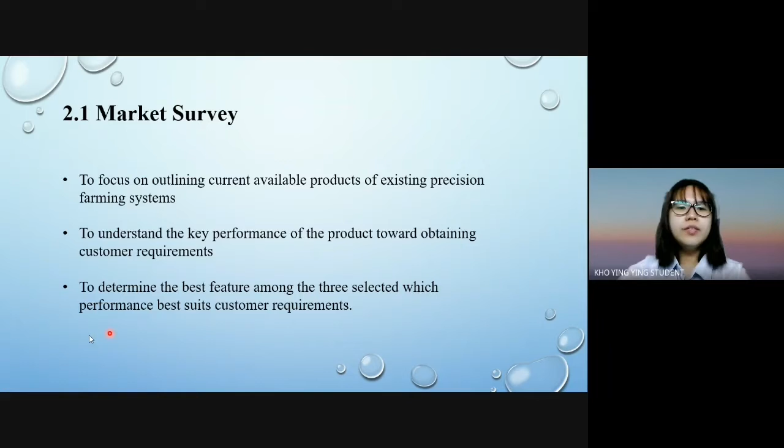Chapter 2, Need Analysis. Market survey focuses on outlining current available products of existing precision farming systems, to understand the key performance of the product towards obtaining customer requirements, and to determine the best feature among the three selected which performance best suits customer requirements.

Benchmarking of competitive products. The first product is Gardena Micro-Drip Irrigation System. It's a timer-based irrigation system that is powered by a battery in order to supply water to the plant.

The next product is Manual Simple Irrigation System with Fertilizer Mixer, which is a simple manual watering system that requires electrical power from the power grid. The last product is TB-hyve XR Smart Sprinkler Control, which is a Wi-Fi based sprinkler timer used to irrigate farms.

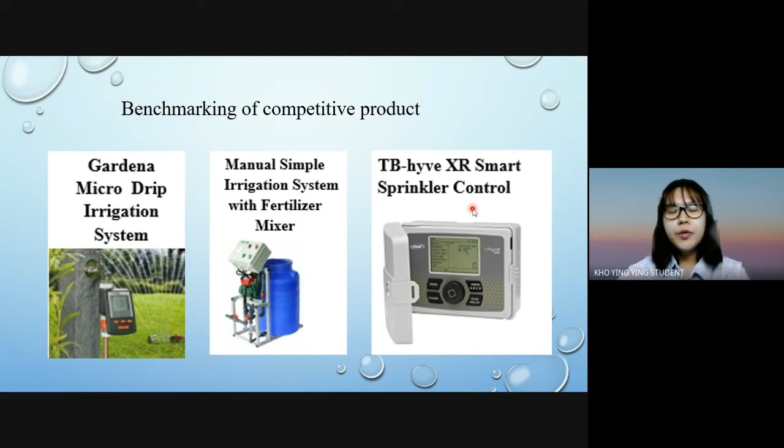Design of market survey: there were 50 respondents through a questionnaire survey. The questionnaire is generated through Google Forms, which gives the advantage of reaching farmers, especially those that stay in rural areas.

These two charts show the customer requirements of respondents for the irrigation system. The chart shows the questions we asked in the Google Form, and the feedback of respondents to the smart irrigation system.

It shows that the percentage for the smart irrigation system being environmentally friendly is the highest at 72%, showing it is the main priority for the system. Following with the second highest percentage at 68% is that the smart irrigation system can minimize water usage and save time. The third highest percentage at 66% is that the system uses low electricity and can reduce manpower.

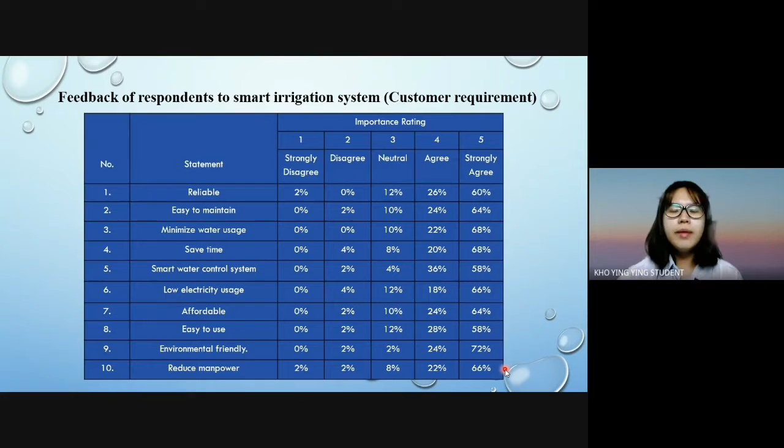The table shows the respective weightage of each criteria: minimize water usage, save time, low electricity usage, environmental friendly, and reduce manpower are rated with a weight of 5 due to their high demand. Weightage of criteria with a weight of 4 is for criteria above 60%, and weight of 3 is for criteria at 60% and below.

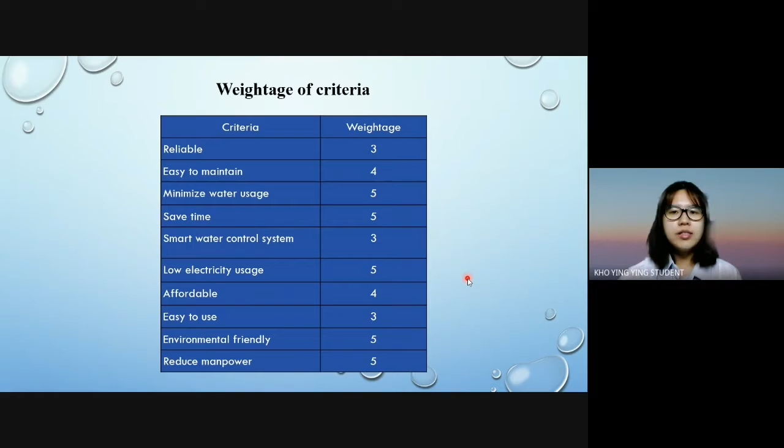I will explain about Chapter 3, Design Specification. In Chapter 3, we have the House of Quality. House of Quality is a kind of conceptual map which provides the means for planning and cross-functional communications.

It is used to define the relationship between customer desires and the product or company capabilities. The HOQ diagram uses a design that resembles the outline of a house and can be created using technical and competitive benchmarking data. HOQ is considered a primary tool used during quality function deployment to help facilitate group decision making.

As we can see from the chart, it contains customer requirements on the left side and design requirements or engineering characteristics on the upper side. Based on the chart, cost is the highest among other engineering characteristics, followed by volume of tank in second place and durability in third place. From this, we know what is most important to the customer.

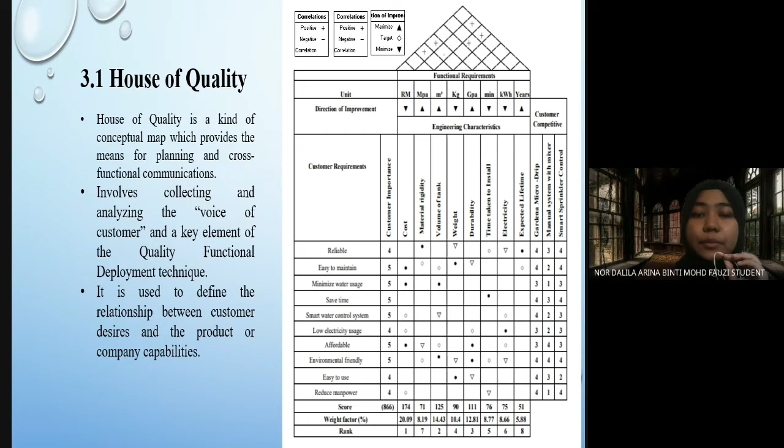This is the Product Design Specification, or PDS. The PDS is the basic control and reference document for the design and manufacture of the product. It is a statement of what the product should be and should do. The PDS is created during the problem definition activity very early in the design process.

There is product identification, special features, key performance target, service environment, market identification, financial requirement, life cycle targets, manufacturing specification, key project deadlines, social, political, and legal requirements, and lastly, physical description.

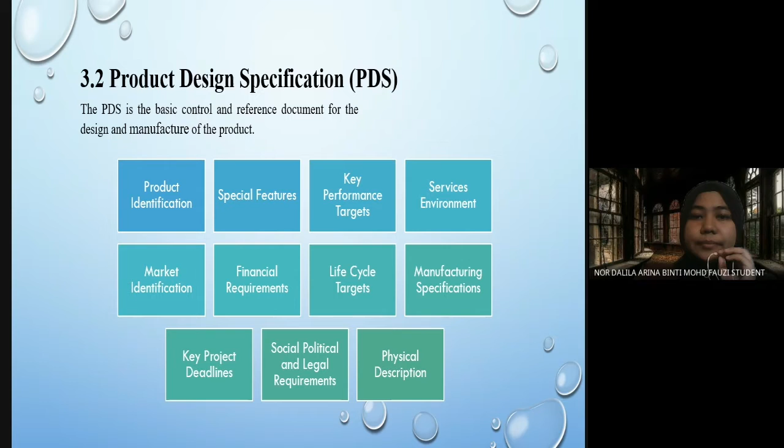Next, we move to Chapter 4, Concept Generation. In concept generation, there is physical decomposition, which is a process of separating the product or system into subsystems, subassemblies, and components to describe the parts joined together to create the behavior of the product.

From this picture, we can see the smart irrigation system has three subsystems, which are the mechanical subsystem, control subsystem, and power supply. Under the mechanical subsystem, there is the pump and valve, which we use to operate the water.

Under the control subsystem, there are Arduino and sensor. Arduino is a microcontroller that has a USB connector and power port. For sensors, we use humidity and water level sensors. For power supply, we use battery and solar panel.

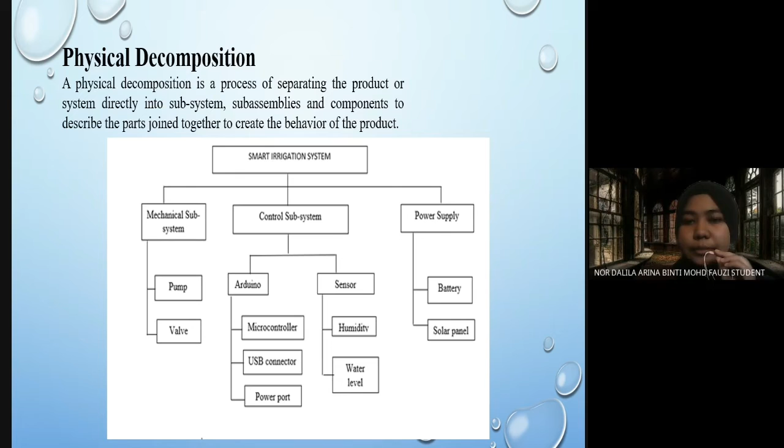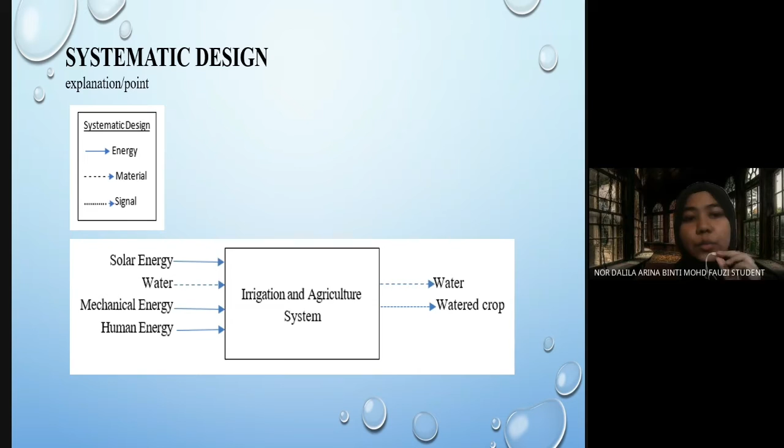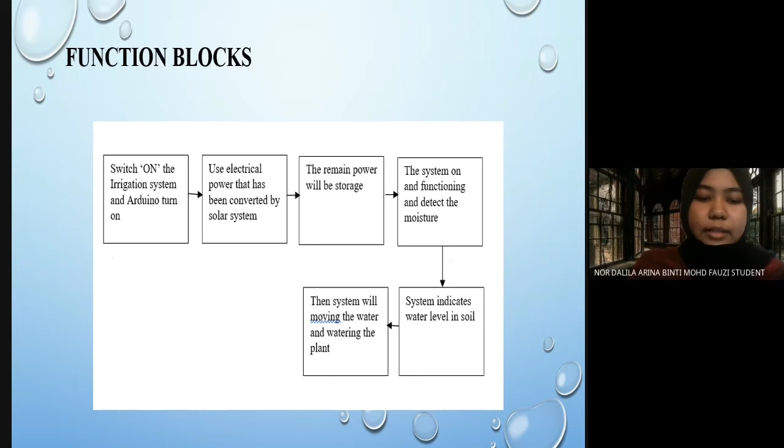Next, we have function blocks. The figure shows the function blocks of the smart irrigation system, representing the importance of each function of the device being used. There are three concepts that we proposed. After a few discussions among members, we agreed to choose concept 1.

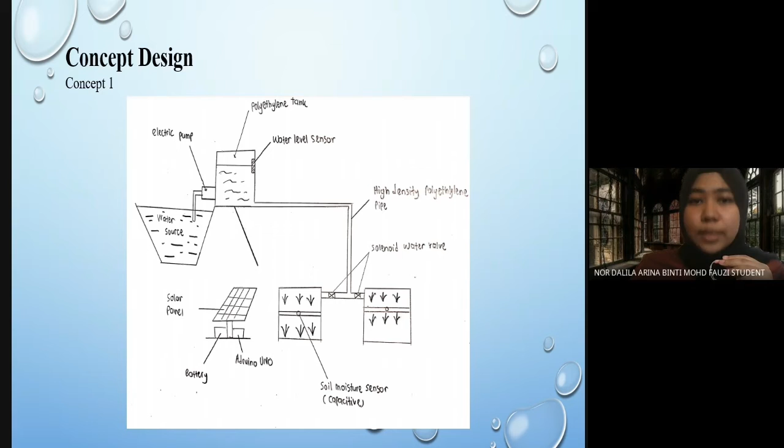Next, design parameters and constraints. An important part of the problem recognition phase of the design process is to identify important design issues or parameters for consideration. This will form the criteria against which we will evaluate the design alternatives. In a project report, we need to identify which parameters need to be considered and additional parameters that need to be added to the list.

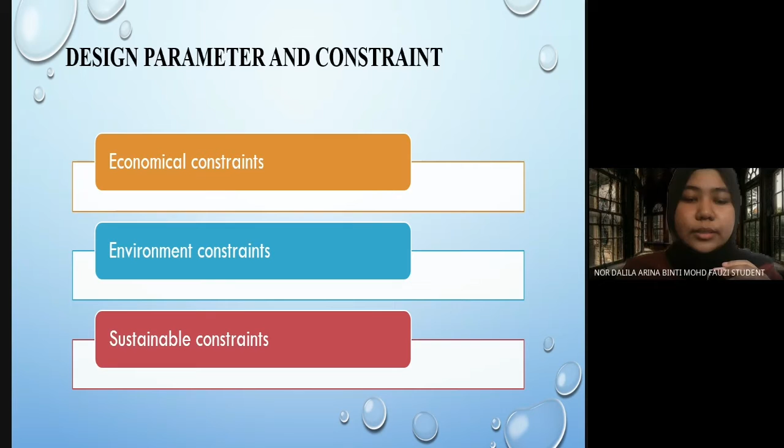First, we have economical constraints. Then we have environmental constraints. Last but not least, sustainable constraints. That's all from me, thank you.

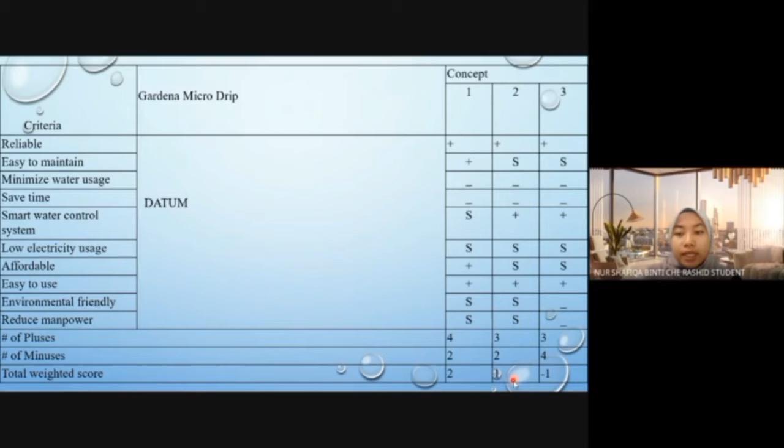Concept 1 obtained the highest total weight, which is 2, while concept 2 obtained 1, and concept 3 obtained negative 1. So the second Pugh chart is created to determine the best final concept by using concept 1 as the datum. Concept 3 shows relative weakness in friendliness and reducing manpower. The total weight scores of concept 2 and 3 both obtained negative values. Thus, concept 1 is the best concept among the others generated.

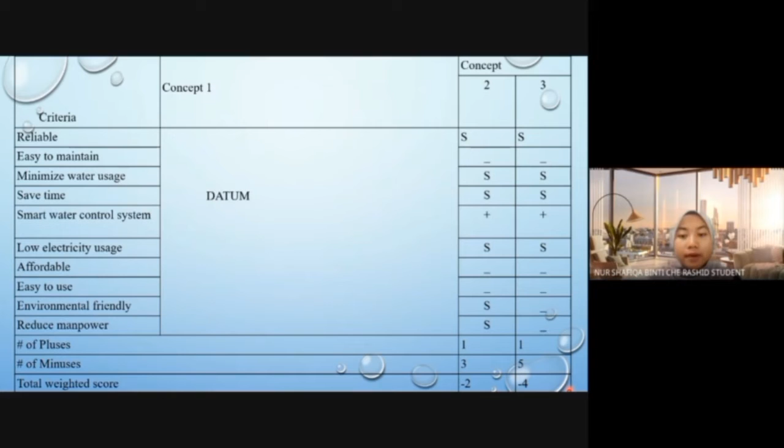The next method is the weighted decision matrix. A weighted decision matrix is a tool used to compare alternatives with respect to multiple criteria of different levels of importance. It is a list of values in rows and columns that allows an analyst to systematically identify, analyze, and rate the performance relationship between a set of values and information. The matrix is useful for looking at large masses of decision factors and assessing each factor's relative significance.

A rating for each concept at each design criterion is obtained by multiplying the score and the weighting factors. The overall rating for each concept is the sum of these ratings. So the rating for each concept has been obtained. From the table, we know that the weighted decision matrix indicates that the best overall design concept would be the one with the highest total, which is design concept 1 with a rating of 7.82.

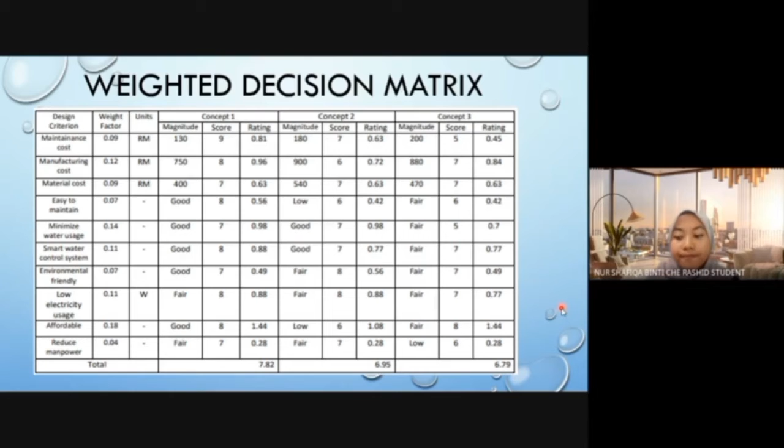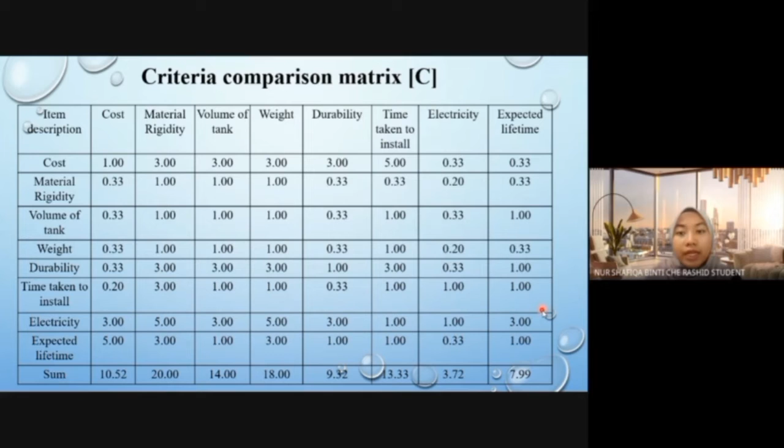So we proceed to the next method, which is the analytic hierarchy process. AHP is a methodology for making a choice among a set of alternatives when the selection criteria represent multiple objectives, have a natural hierarchical structure, or consist of qualitative and quantitative measurements. The function of the AHP rating system is to create the initial comparison matrix as shown in this table. The AHP process for determining criteria weight completes a criteria comparison matrix using a rating of 1 to 9, as described in this table.

So for the last one, the selected design concept. As you can see here, conceptual design 1 is selected as the final design project. It was selected due to making complex decisions using AHP, weighted decision matrix, and Pugh chart, which consider important criteria. The criteria were obtained from the results of the House of Quality based on engineering judgment.

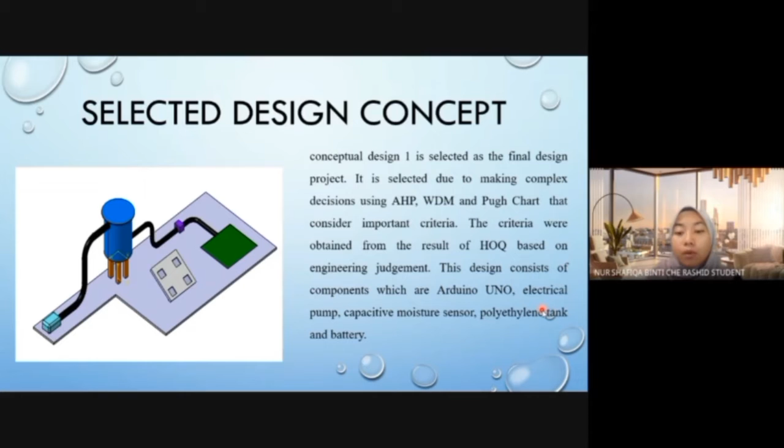This design consists of components which are Arduino Uno, electrical pump, capacitive moisture sensor, water level sensor, polyethylene tank, and battery. That's all for my part. Thank you.

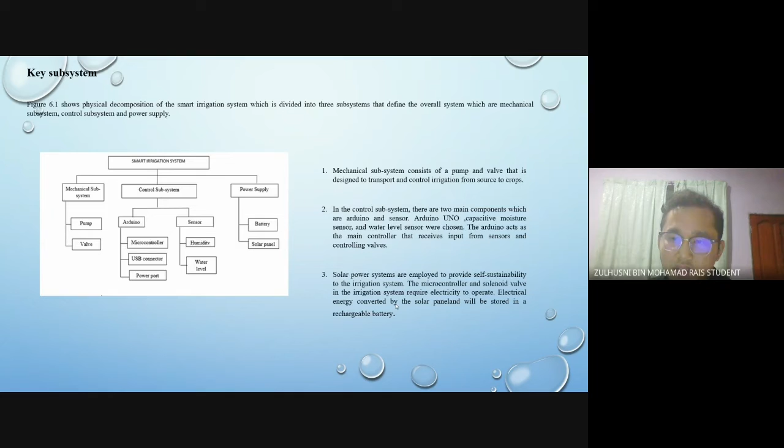Arduino, capacitive moisture sensor, and water level sensor were chosen. And lastly, a solar power system is employed to provide self-sustainability to the irrigation system. The microcontroller and solenoid valve in the irrigation system require electricity to operate.

Electrical energy converted by the solar panel will be stored in a rechargeable battery.

Next is product architecture. Product architecture relates to function elements and function structure. First, solar energy is captured by the solar panel and converted to electrical energy.

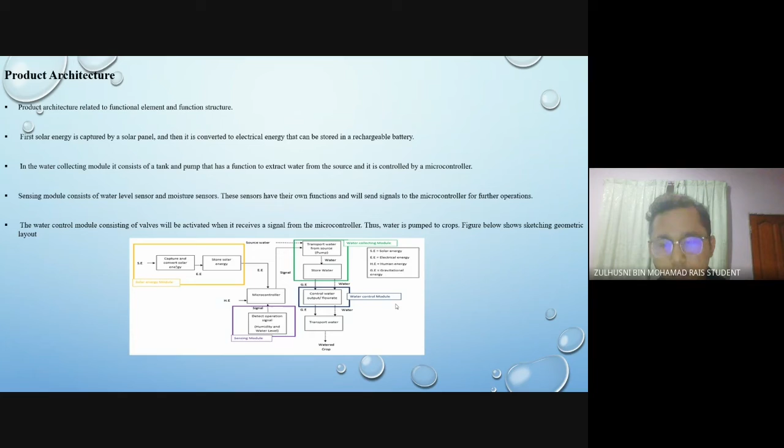Then in the water collecting module, it consists of a tank and pump that has the function to extract water from the source. Then the sensing module consists of a water level sensor and moisture sensor. These sensors have their own function and send signal to the microcontroller for further operation.

Then last, the water control module consists of a valve which will be activated when it receives a signal from the microcontroller. So this is the sketching geometric layout, and real prototype design.

Configuration design. Configuration design problem is mechanically involved finding optimal assembly of components that realize some desired performance criteria. It is a type of operation of conceptual design in which physical design forms from a set of predefined elements and structure, which I will synthesize and continue to detail design and prototyping.

In this configuration design phase, the part layout will be refined. The part layout is the process where all specifications, parts, and estimation of components are combined and created to become one product. There are several schematic drawings.

Parts and components needed to build the smart irrigation system circuit are shown in the schematic drawing. Different system parts and components have their own function to support the operation of the system. In this system, we use two types of sensors.

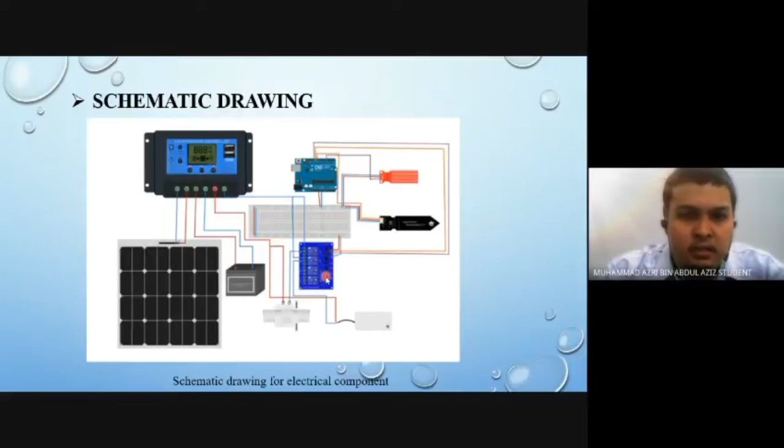The following table will show you the parts that we use in our project: water level sensor, moisture sensor, solar panel, solar charge controller, battery, solenoid valve, water pump, and a relay. Each component has its distinguished function in order to establish the entire system. So there are 8 main parts that we use in drawing.

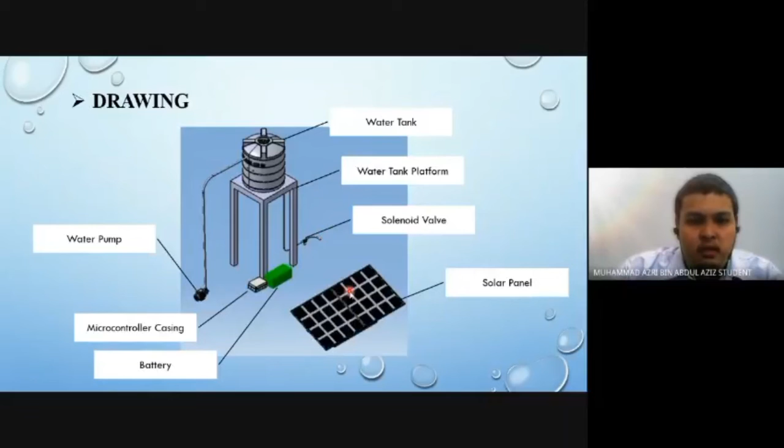The isometric view of the smart irrigation system is drawn using CATIA, which is a computer-aided three-dimensional interactive tool that consists of a water tank platform, solenoid valve, solar panel, battery, microcontroller casing, and water pump.

Engineering analysis. The three-dimensional model of the smart irrigation system is translated to ANSYS Workbench in order to perform analysis. The analysis done is static structural, which is to analyze the total deformation of the water tank platform, or we can call it the water tank base.

So the assumption is we have a tank with a capacity of 400 liters, and the platform material is made from concrete. As you can see in this picture, this is the meshing process. Meshing is a process that divides geometry into multiple elements. It has influence on simulation convergence and accuracy.

On this side, you can see the result for total deformation. Before we can get the result, we must determine the pressure exerted on top of the platform base. From the assumption, 400 liters of water exerts around 400 kilograms of mass, and with respect to the area, we calculate the pressure and find it to be approximately 5,000 Pascal.

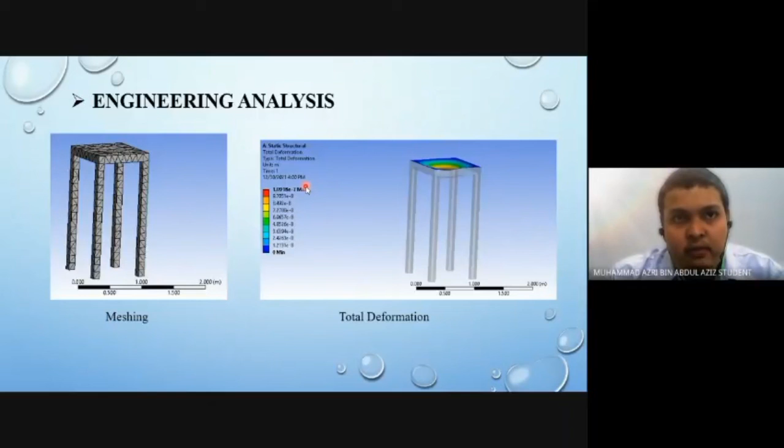So after we apply the pressure on the top platform, we get the result, which is the maximum total deformation shown in units of meters, equal to 0.00109 millimeters, which is relatively small. This type of analysis tells us that the choice of capacity of the water tank and the material for the platform base is suitable.

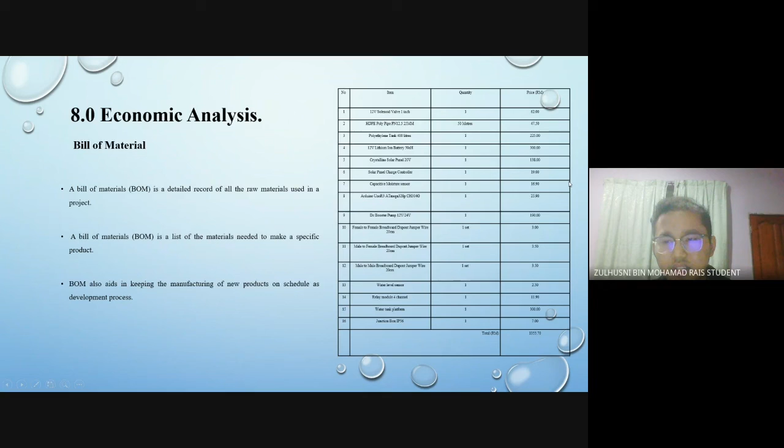Chapter 8: Economic Analysis. Bill of Material. A bill of material (BOM) is a detailed record of all the raw materials used in a project. A bill of material is a list of materials needed to make a specific product and is kept during manufacturing of the new product.

Chapter 9: Discussion and Conclusion. The concept of prototyping: generally, the concept is to design and build a smart watering management system that is suitable and practicable to be used in planting. Smart irrigation system is designed to facilitate the efficient growth of plants under specific conditions based on user input.

There is an economic analysis on the product, a study of the economic production process based on economic analysis. The goal is to determine how effective the economy is at producing this product, focusing on optimizing water resources without wasting it, which helps farmers especially during dry season.

Decision-making techniques such as Pugh chart, decision matrix, and analytic hierarchy process (AHP) are used to determine the best option based on the concept that has been generated. We got a profit of about 344 ringgit and 30 cents, and gross profit margin of about 20%. We use the Arduino as the controller to control the system because of its low cost and capability to carry out the fundamental functions compared to other microcontrollers.